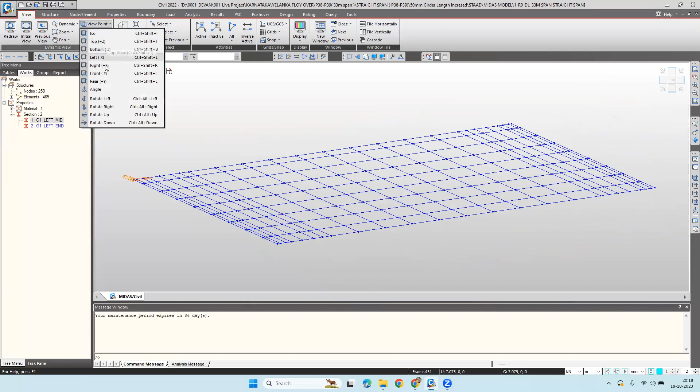Devani also has some doubt. He did not come yet. Yeah. So my first one. I have created all those wherever I need the node element, all those things I have done. Okay, then wait. Why are you using this? You have right side viewpoints available, the right corner. You do not need to go in that. But still, if you are using, okay.

Then, creating the property, material property is done. In section property, I have section PSCI. You are using composite, I think. Yes, you are using this one. This is also fine. What I'm telling, this you can use, but in this, if you have monolithic structure, monolithic means your slab and girder are going to be cast at the same time.

What will happen if you do not design in Midas? This section is fine. Only you are going to extract the forces from Midas. That is also fine. This section, if you are using, is for analysis purpose, that is fine. And if you are checking the final stresses, that is fine.

In this, you cannot differentiate a construction stage in which the slab will come after 15 days or 28 days. The girder, PSC, and top slab will come monolithically. They will come together, not as different parts, because it is right now a combined section. If you want to do preliminary design, this section is fine. Or if you are going direct, then we have to go for this one.

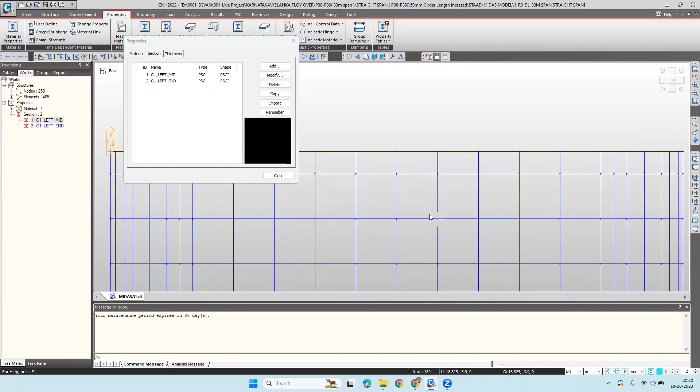Maybe I can tell you generally what will happen in the curve span. Your girder will be straight. Let me tell you some theory about curve span. Okay, sir, I will come to that point. Yeah, I will show that.

The second point is, this is the mid one I created and the end one I also created. It automatically assigned; I don't know how to unassign it. Second thing, if I create the tapered portion, in tapered I am creating PSCI. Yeah, this one is correct. Then section I and J. I have selected end support input. It will maybe give you some error.

One side is coming okay. That means support to mid section, it's creating automatically. Y axis variation, you can see cubic and parabolic. Why is it coming? Listen. First of all, your section is not that accurate. If you look at the sizes, your top flange is not matching the top flange of the other section. Can you see clearly?

I have tried more than 1 hour. I have wasted my time. See, BL2 is 1.3, I got it. Generally, that happens with everyone, not only you. Initially, I also faced it. Okay, let me give the control. BL3 is 1.3, and here also BL2 is 1.3. Two seconds. Can you give me the controls?

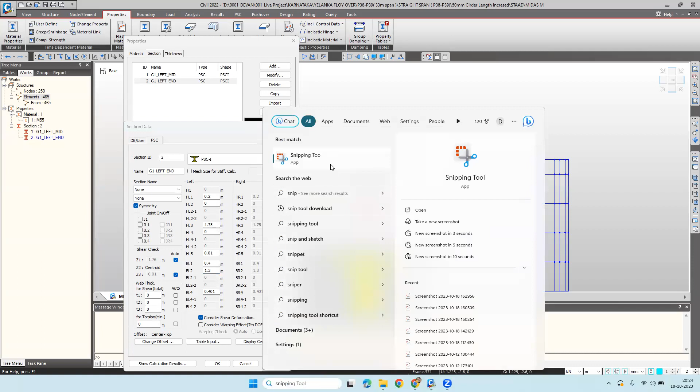Can you take a screenshot of it? Maybe I will take the screenshot, so we will be able to remember it. That's how we need to see the two properties. Okay, it will be there. Fine. Now open the other property. You do not need to. It's also here.

BL1 is how much? 0.1875. First of all, your BL1. BL1 is not the mid portion. First of all, 375, so here BL1 will be half of that. I got it. Can you open that in the side view? What do we have?

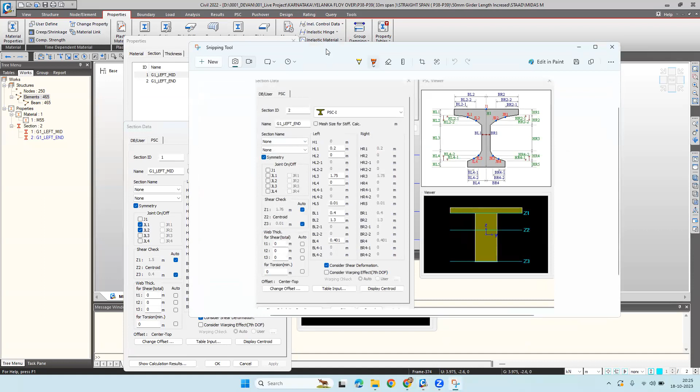Because BL2 is 1.3 in that also. Can you open the screenshot? Yes, sure. This is 1.3 and BL2 is 1.3. BL4 is 0.401. So here also I need to update BL2? 1.301. No, 401 is fine, do not change. Equal 0.4 is fine.

0.9 is fine. Do not make them equal. A little bit different, 1 mm difference should be there. That's what I'm trying to tell you. So put 901 for this 9. That is fine. Change 1.3 into 1.301. Maybe change it here, it will be able to take it. 301. Yes, okay.

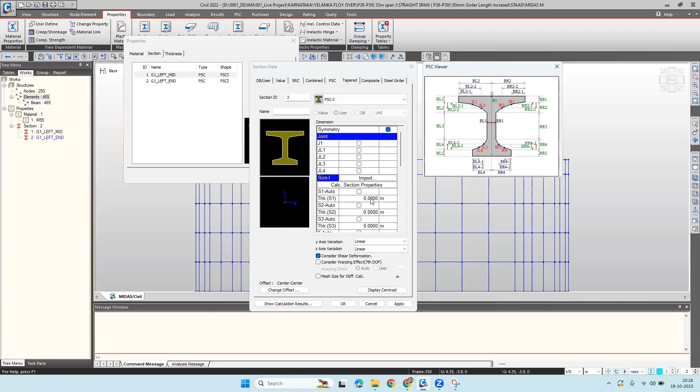Now try to create the tapered section. We need to go to tapered, PSC-I. Now here, select your import section. Fine. Now just give it any name or show calculation results. If it's taking the property, you can check. Check calculation result. Now it is coming. Yes, now working. Just give it any name.

Now working, problem solved. Yes, ma'am. This is the solution: both sections should not have equal dimensions. Simple as that, a 1 mm difference should be there. That is the main solution. So now your second point is that it is automatically taking properties, you are saying?

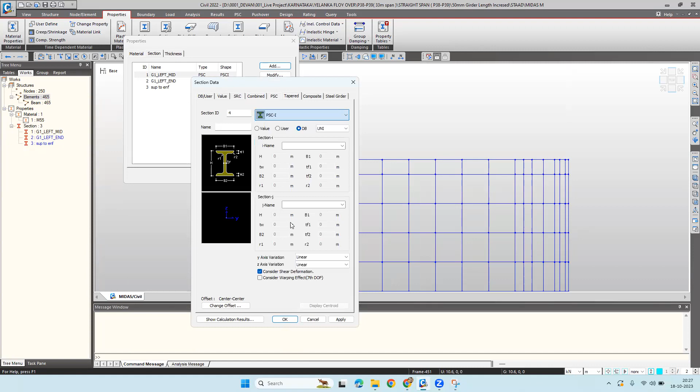Yeah, the first point is taking automatically. For the second point I got an error. No, it is solved now. Let me know about this one also. Here, parabolic, you have clicked on the y-axis variation. Y-axis variation should be linear, not parabolic. Parabolic only comes in your balanced cantilever structure. Linear. Fine, this is also linear.

Cannot calculate the stiffness. Check the centroid, click on the centroid. Not the center. It is taking something. Okay, just press OK, no issue. What is it saying? Calculation result: cannot calculate stiffness. Section dimensions have been incorrectly entered. I need to see whether pressing linear has changed something.

Can you close it? Just show me again, do not click on that. Can you go above and again to import and export? You have done it. If one is created, the other one too; go a little above. Symmetric. Here, J1, J2, unselect; is J1, J2 required? I think previously you selected it or not, I don't remember. Okay, selected. Let me check.

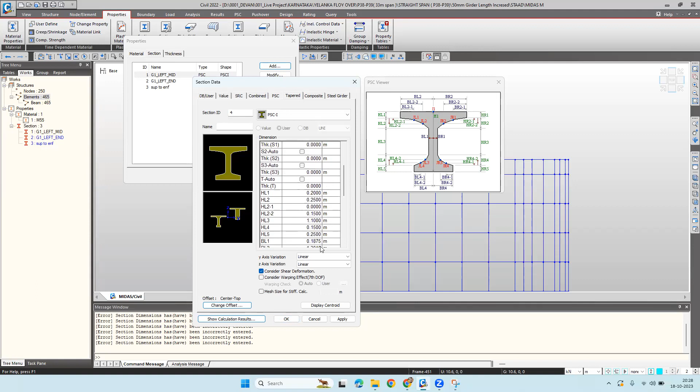You can open that. I didn't do anything previously; now it has automatically been selected. Can you close and try again? But do not select that linear one. Do not change that. I'll just create it again.

Let me check, sir. Here linear will be there. These should be linear. I know, if you do it, I know what kind of tapering is going to happen. It is parabolic or cubic tapering. Okay. Now, here, import. Yes, first I need to import the midsection. Okay.

Import. Got it. I think I know why it is happening. Okay, click. Then midsection. Just click OK directly. Do not go anywhere. Name it. Invalid section name. End to mid, this is also okay. Mid to end. Okay, fine.

Okay. No, same error. Section dimension is. Just go through the dimension BL4. Here, change BL4 into 0.40 and upper. Just change it, delete one. Delete this 0.401 into 0.4. Okay, fine. Now click OK. And go above. No issues. Go a little above, because both section properties will be here.

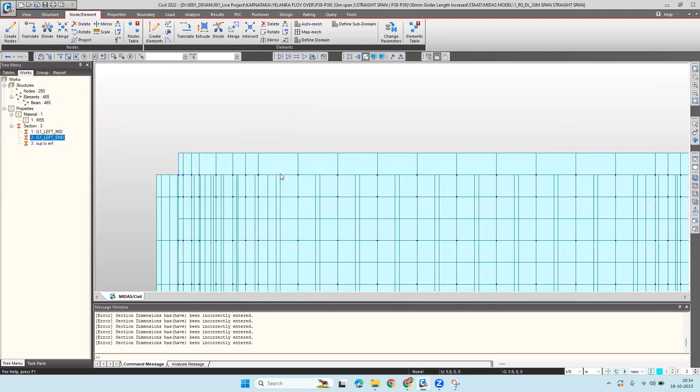But yes, in this, then how can I... Yes, tell me. Automatically it is assigned for all or? No, that is fine. It automatically assigns it. But if you want to change it, select that element and drag and drop the property. You getting my point? Okay. So which element? No, first of all, go to line model. How? Go to line model. Go to line. Yes. Okay.

Now select here. Click on the selection material. You know that I always click on the yes. Now which member you want, which property? No, first of all, do not select the members. Select member. Select anything. Now this member is also selecting. Do not select from left to right. Select it from right, yes, like this. Now drag and drop that property. Drag, yes, it will be applied to this member. If you want to change another one, create the property and drag and drop.

Okay, but why is it automatically assigning it for all? What generally happens is, when we do not assign any property and we create one property, Midas has this kind of internal system: it applies that one property to all the members which are available. So afterwards, when we create different properties, we need to update our model. Midas does not know that you created other properties for other elements also, so we need to give the command.

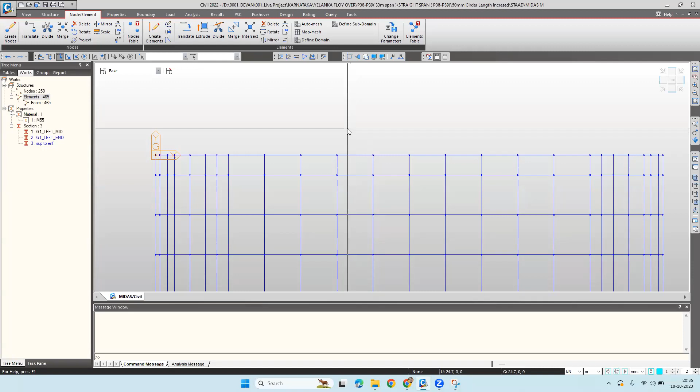Same in STAAD, but STAAD does not take any property; instead, we need to apply every property separately. But here it just takes the first property by default for all the elements. All the elements. Okay. Yes, first property only. But afterwards you can change every property, just by simple selection and by drag and drop. Yeah, then I'm showing that curved span you were asking about. Yes.

Yeah. So this one, what I did, I have... Do you have a drawing? It will be best if I can guide you with the drawing. No, I just created it from AutoCAD. Okay, just show me this AutoCAD drawing, so maybe I can tell you if you're doing it correctly or not. Because with the drawing I do not even require the model. I can easily tell from the drawing itself. Okay.

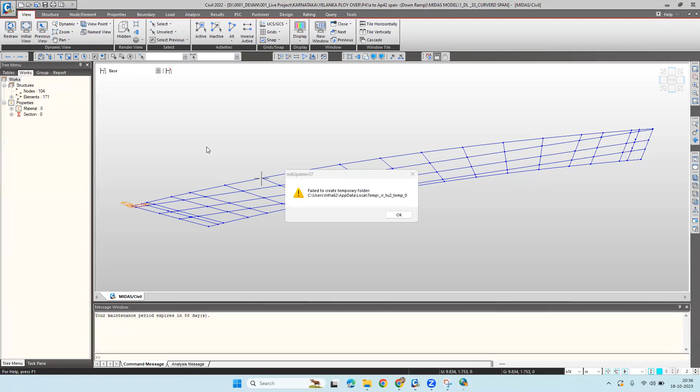Okay, does not look good. Okay, looking good. Your span girder should be straight. Yes, show me the top view. Top view. Yes, it will look like this. Fine. Now what is our problem? So here the cantilever will be 2.4. Yes, it can be possible. So in the STAAD model, we did a straight model only.

Like that only we did. Instead, you are only able to do skew or straight. Okay. So we ran the vehicle in the straight portion and we got a huge bending moment. So in the same manner, if we do the same model in Midas, you can very easily do it in Midas. You just need AutoCAD, and it will not take more than 4 hours for the whole model.

Yeah, sure. So I modeled it here, but it is still wrong. I'm trying to tell you why it is still wrong. First of all, the transverses you have created, that is fine. You tried to create perpendicular ones, but those are not looking that good either. I will show you in the AutoCAD drawing. I will tell you what happened in Midas itself.

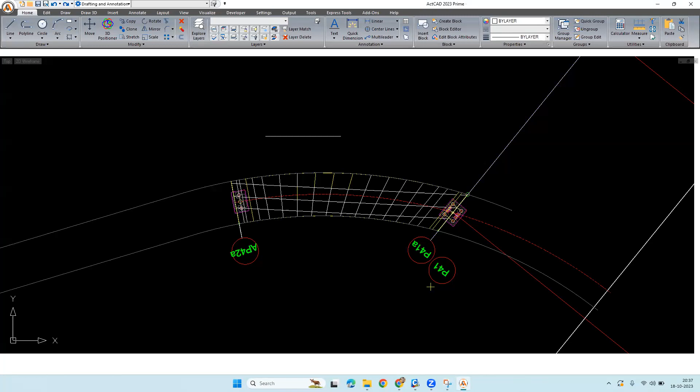What is this ActCAD? Some different software? Yeah, it's an Indian company. Okay. I know about one other CAD, I forgot the name.

Now you have done the same. You can directly paste this thing in Midas itself. That is fine. But what is going to happen? That's what I'm telling. I got your situation. Previously I also told you your end girder has more length compared to your mid girder, and the other end girder has less length. First of all, I want to know why those two piers are skewed in different directions. Why is it making a cone shape? It is a site requirement.

It will be there, not going to change this direction. This is a down ramp. We have to give it like this only; we don't have any option. Okay, that is fine. If it's a down ramp, you do not have any option. I got it.

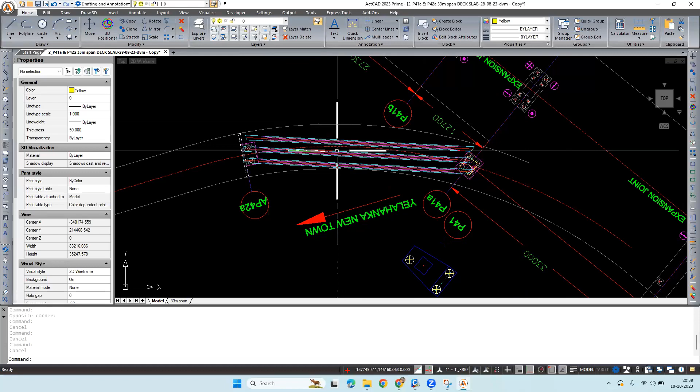Initially, they had given a box girder. Box is always best. Box is best, but they are telling me it is only 6.5 meters, and they don't have any shuttering for that, so they are asking for girders. I got it. I have done this model in STAAD also, but it's getting a huge moment.

I can model it if you can give me the drawing. Just let me tell you first. I will share my screen. Stop your sharing. I will tell you some basics about what happens in this kind of modeling and how you get the wrong result.

First of all, why you are getting the wrong result, and why initially everyone gets the wrong result. Even if I'm not that experienced and had not seen the curved bridge, I would get the wrong result; I know because I have already seen it and done it. What is happening? You have one pier cap. You can see my screen now?

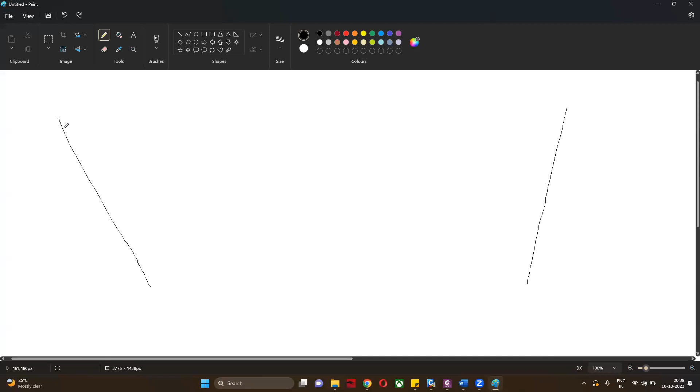Yes, sir. You have one pier in this direction and one pier in this direction. That is how the pier cap looks, and your bridge is moving like this in this curve, like this curve and this curve. Now, basically, as per our girder methodology, our girder will always be straight. So you provided one girder from this point to this point, and then one girder is here. Then last, let me make this straight. This is your one girder, this is your one girder, this is your one girder.

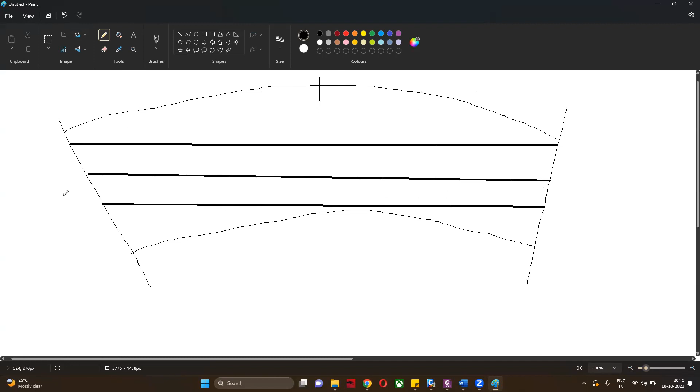Now, what is happening in STAAD? You cannot even model the curved span. You can only have a straight one. Then you try to run the most eccentric point of loading, and it is giving the maximum moment at this location. That is happening in STAAD because it is also creating torsion. Lot of things are there. STAAD is not able to properly analyze your curved span bridge.

And in Midas, you have provided this kind of transverse bracing or transverse member. That is also, you can say, not correct in the Midas modeling. What is going to happen? You need to provide one central line or something through the curve portion. Let me show you. Maybe I can show you one model also. Just give me a second.

Before that, what is going to happen? Your vehicle is not going to go straight. Your vehicle will go like this. You're getting my point? Your vehicle is always going to move like this. So we need to reproduce that behavior very accurately. We do not require any other behavior. So let me show you one example. Give me 2 minutes. I need to connect one drive to show you.

Like the box girder, that curved one you did as a line model, sir. Like that, it should be in the curve only, no, sir? Hello.

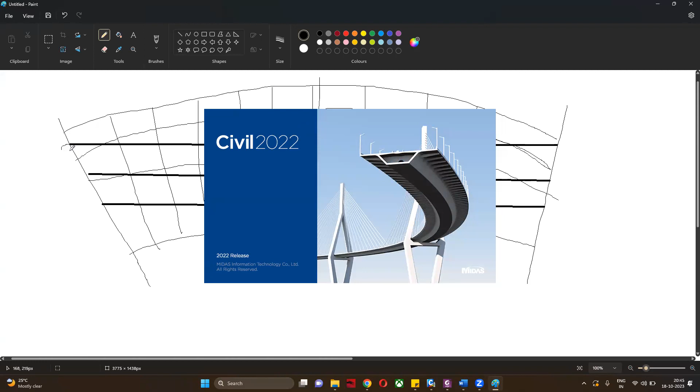And in this, I think Vignesh, in your arrangement, this girder will have more. You need to design for more PSC force as compared to this one and this one. First of all, this is the bigger one, and you are getting more cantilever in this portion. All three girders will not have the same kind of PT or reinforcement. G1 will be critical, no, sir? Yes, this one, G1. We have to give different PT. Yes, that's why I'm showing you this model. It is pretty much based on this.

You can see here, these are my I-girders. Skew I-girders, and the bridge is moving like this. You can see these lines. So my bridge is in the curve direction, and I have provided skew I-girders. Then we have to provide this curve nature. They did not ask to provide any box because this is a single span bridge. So they never ask for box. So they are going to put a lot of I-girders. If you look at the 3D view, maybe I can show you.

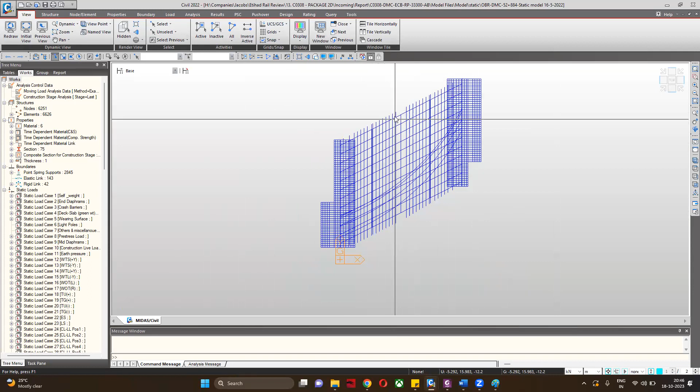So that's what I'm trying to tell you. You need to create that kind of curve lines to model your live loads accurately, and you can provide your transverse members directly straight. Now, if you look at it, that's how the bridge is moving. This portion is totally empty. Nothing is there. My slab is only at this location and at this location.

And if I go into the live load, I can share this model with you, what I'm trying to tell you. Where is my moving load? Maybe I can also show you from this. Moving load. You can see the curve skew display. That's how your moving load will move, not in straight lines.

Straight lines are for what purpose, sir? Straight are my girders, man. These are girders. You can see another one. No, this curved portion, the curved lines are girders, no, sir? No. Curved lines are my road. That's what I'm trying to tell you. Curved lines are road. Straight lines are your actual girders. So your live load is moving in the curved direction. So what you need to do...

You need to provide one curved line in the center, and then you need to model all the live load according to this line. That's how you will get it.

If I go into here, let me see the property. How many girders are there, sir? Here. And also they will cross this cross beam, but your path will be in curved direction. Your path cannot be straight.

What generally happened previously when Midas was not available, we always tried to do a straight one, considering a little extra moment, because staad does not have that much property available, or you cannot play very much with the coordinate. We can model the skew one, but curve is pretty much very difficult.

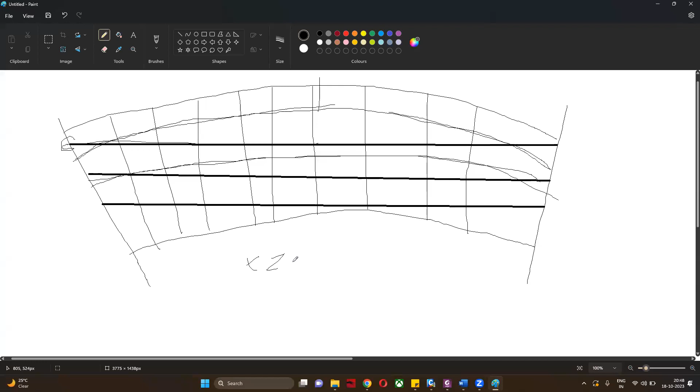In staad also it is possible. You need to provide your x and z increment very accurately so that it can interact with the actual behavior of your curve.

So what is happening here? In your case, first of all, you will model all these things. You will provide these as a straight member. Your cross member should be straight, all cross members, like this. You can see cross members, all are straight, like this.

Okay sir, and then you need to provide a curve line. One, maybe imaginary line will be there, a dummy line. But you need to provide your live load according to this dummy line.

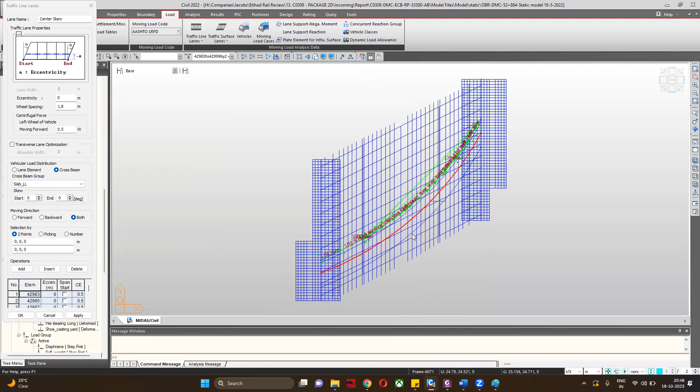Like here, I will mention a different color. From the center, if this is my bridge center, so your dummy line will go like this. And you will bound your live load with this dummy line and with this straight cross member.

So your live load distribution should be very accurate onto the whole bridge. It should not be like this, where mostly will be taken by the cantilever or less will be taken by this. Every live load will equally be coming to the girder, but because of this length, they will have some extra load on this outer girder.

But actually your whole bridge is taking your live load, not only this girder, but my live load is positioned in this direction, so that's why I have more live load as compared to these two girders. But actually, my slab is transferring live load to the girder, and the slab is also connected by another girder and also with this girder.

This will also distribute some live load. So that is the main thing in a grillage model. We need to distribute our load from the slab to the girder in such a manner that it should not go into one girder only. It should be distributed in every girder, so that you can only be able to model properly.

If I have the time, I can show you the modeling also. It will not take me that much time, but maybe tomorrow or any other day we can have a session. Maybe tomorrow, if both of you are available, I can show you how to do that. Midas will give you very accurate results for what happens in a curve bridge. First of all, you need to apply this course.

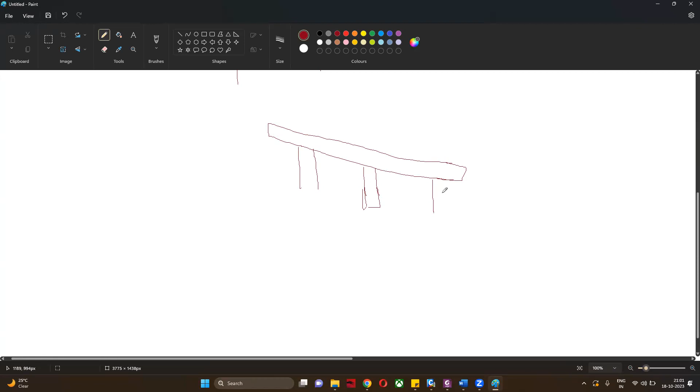Now what will happen? It is not that simple geometry. So you will have different pedestal heights. This will be small, this will be bigger, then this will be the highest one. That is the main role of the pedestal. But the pier cap should be straight, no issues. Now, with traffic at this location, the most curved span, my vehicle at this location, what does it try to do? It will apply one extra force in this direction.

Radial force. Like if you have any circle and you are applying force in this direction, the force always wants to move to a stable position. So this wants to move in this direction, but our bridge is restricting it. They want to move in the curve direction. So this is your centrifugal force. First, this force is happening. The other force is due to this curvature, directly the dead load.

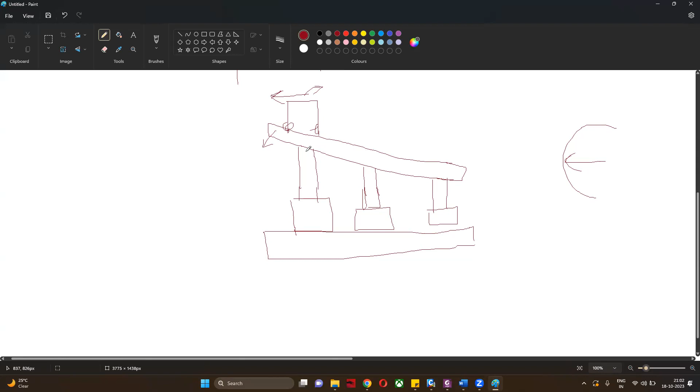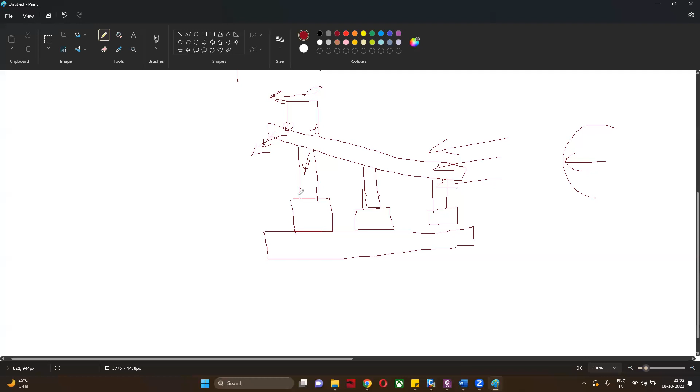What is happening in this? Your load is higher on this girder. Your slab has more cantilever at this position, so your bridge is also moving in this direction. You have this centrifugal force, and other forces like wind blowing in this direction. So everything is moving against you. This will have compression and this bearing will try to topple. So your bridge will try to rotate in this direction.

That majorly happens in very curved bridges. That's why sometimes we treat curved bridges as special bridges, because curved bridges have this kind of negative reaction. If you have a very steep curve, it is very difficult to design unless you provide monolithic connection. The best solution is to not provide any bearing, provide direct pier reinforcement to your column, so it will be monolithically connected with your pier cap, or your diaphragm should be monolithically connected.

You will have reinforcement of the diaphragm with the pier cap. That is a basic solution available all around the world. We provide continuous bridges without any bearing. You get major hogging at that location. So that is the only solution for resisting if tension is not allowed. The other solution is you can provide the bearing, but again you need to provide continuous bridges, so continuity will try to resist the toppling.

So that is one thing. The other thing, you will provide monolithic. Last is the tension bearing, which can be allowed but needs to be discussed with your client or contractor. If they are okay with it, you can provide a tension bearing, no issue. It's the government's headache if they change it in future, not ours. And the manufacturer's headache, how he will design and provide it.

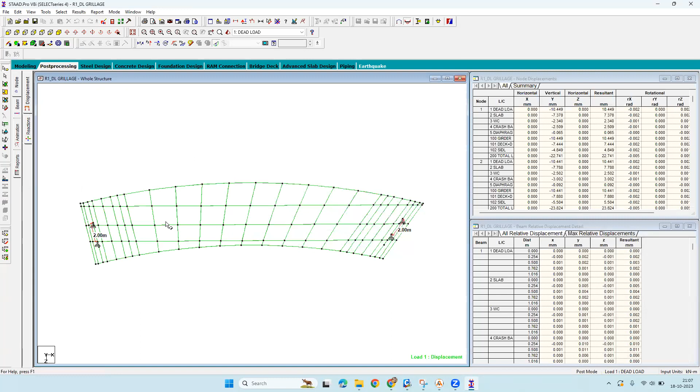Bearing to bearing distance will be around 2 meters. Fine, no issue. Just show me the reaction. And you are still using the older STAAD version. You can update it; whatever the office person gives, you can use that. Right now, for dead load I am not getting anything.

In this case, we need to increase the bearing spacing. If you increase it, we still might get something. I'm telling you, you cannot design it because you are not achieving 20%. One more thing, if you are not getting it, we can go for direct girder bearing transfer. Then you need direct transfer with reinforcement, but then you will have a continuous bridge, and you will have hogging also.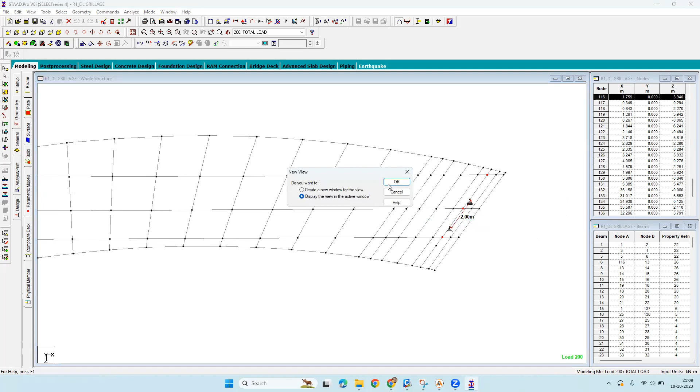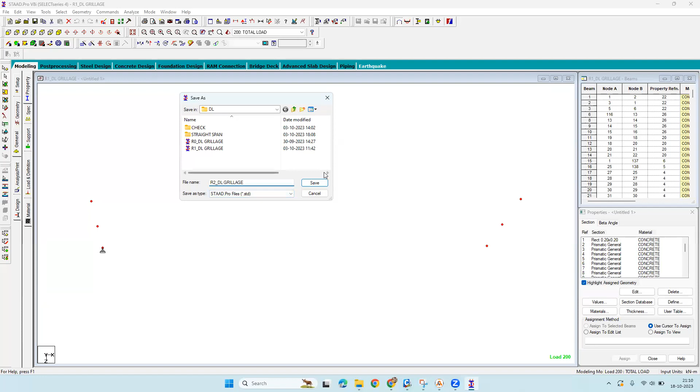What I'm telling is your girder will be directly connected with your pier cap, with no pedestal. Another option: you can provide bearings, but after that is your span straight, or do you still have a curve? You can provide two curved spans and make both spans continuous, the best option. But you cannot make I-girders continuous; it is only possible in a box girder. That is also one thing.

Because your girders are always straight. You cannot. But one more thing you can check. I think straightness is due to the supports you provided. When you have two bearings... You still have a bearing at the diaphragm location. You need to delete those bearings.

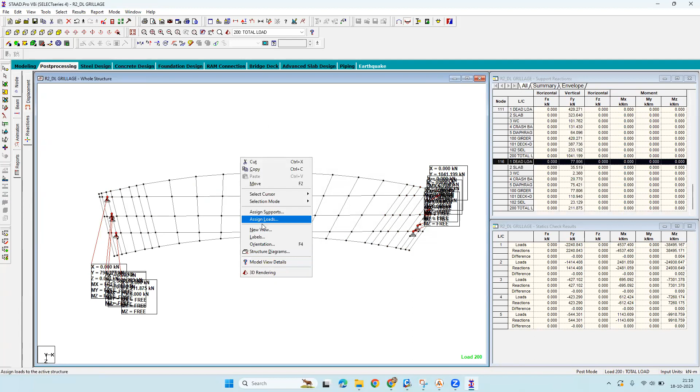Curved bridges have a lot of problems, and that's why people try to avoid curved girders and try to use the box section. And what about the torsion? You will have a lot of torsion in curved bridges. Then you need to provide extra shear reinforcement as compared to the normal one.

Yeah, sir. Curve model. It will not be correct; we will discuss properly. I think we can take one time. I will tell you. If you have three girders, you put only 3 bearings. Here is 5 bearings, here I put 4 bearings. And curve...

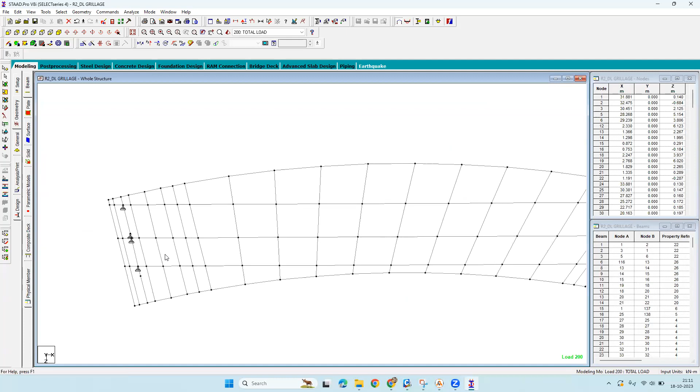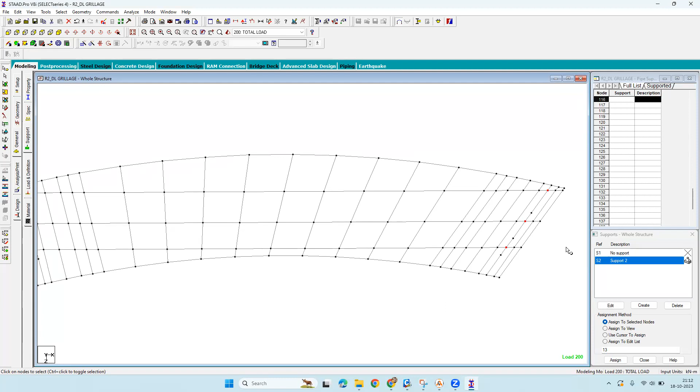Please do not submit a negative bearing reaction to the client without discussing with your senior or anyone. Otherwise, they will think you do not know that we do not allow negative reaction at the bearing unless discussed. Like the pot PTFE bearings you discussed: one fixed like a pin, one transversely free, one longitudinally free, and one free in all directions. But you never consider tension in any bearing. So they will think you do not know this, and they will raise questions on you, not any other person.

I have worked a lot on these kinds of things, so it should be properly checked internally itself. Sir, how much span do you have? What is the total span? 33 meters. Okay, 33 meters, so you cannot provide a solid slab, voided deck slab or anything. Now it is okay, sir, not getting negative.

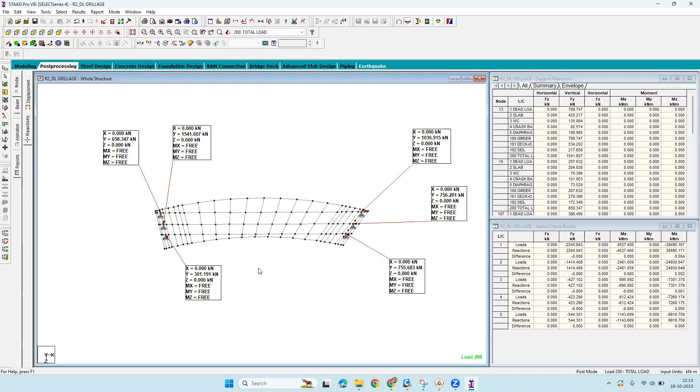The total dead load is fine, but the 20% is not achieved. This is total dead load. Still, you need to fight for it. Sometimes they can design it, but it is not acceptable. 20% dead load is not achieved, so our bearing is not in compression; it does not have any load on it. Sometimes they design this bearing as a tension bearing and consider zero tension force. No, there is some rule, sir.

Where in the code is 20% mentioned? This rule is as per practice; I need to see the code, I do not remember. We generally deal with the client and contractor. For example, for 1000 kilonewton, 200 kilonewton should be there. We got queries after submitting bearing reactions to the bearing designer or contractor saying they cannot design it because we are not achieving 20% of load, minimum compression. So then we need to consider tension, or change the bearing location or the stiffness of the bridge, slab, anything.

Sometimes we even increase the dead load. In the truss, we increase the dead load to resist toppling. Here, will increasing dead load help positively, sir? But in India you cannot increase dead load that much, because you are increasing the cost for your contractor. So do not go into that. We will discuss. I think Midas will be able to solve this. Your modeling is not that good, but if you do it in Midas, we can. Okay, we will see.

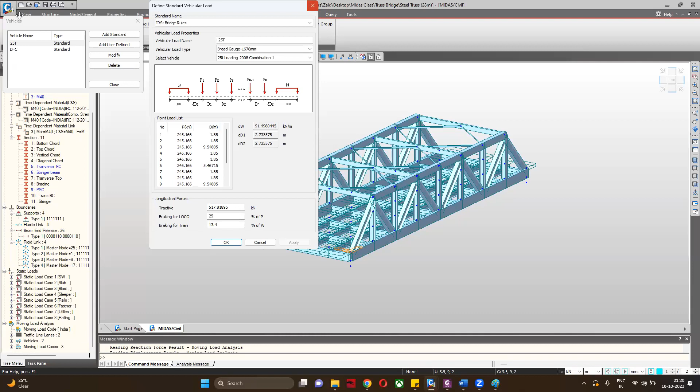And then I have run it also. Then I have provided construction stages, material, everything. Not construction stages, we are going to provide them now. Now what will happen in a truss? We discussed the construction stages previously also.

Vehicle means lane assigning, how, sir, here? The lane is just above the stringer beams, because in a railway truss bridge you will always have a stringer beam. So if you go into your traffic lane, my lane 1 will be at this stringer and at this stringer your second lane. I can show you easily. This is my first lane, and lane width will be 1.676.

We have some minimum distances for highway and also for the railway. Yes, railway also has it. The distance between two railway lines center to center is 4.5. If you have one railway here, maybe I'm not able to show, let me create it.

So can you mute? I am not the one. I do not know. Mute will be okay.

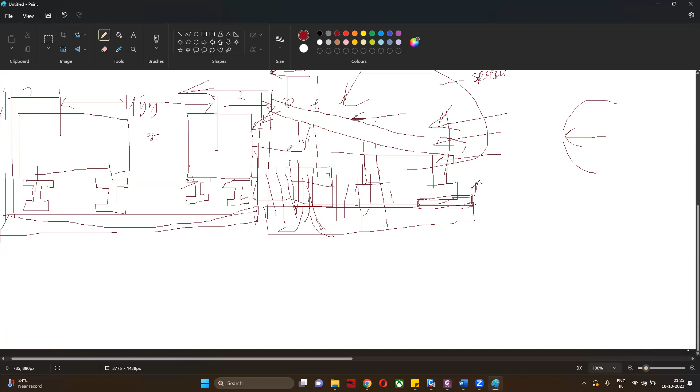It can become lower: with ballastless track, like for metro, it is a little less, like 8.5 or 9, because they do not have ballast. So you can reduce it. All cables are inside your U-girders, and the electricity column is on the parapet of the U-girder. So it is an optimization thing. But for normal steel railway bridges, you will have minimum 9 meters because of ballast and everything. I have designed 9.5; it is workable everywhere.

And this 4.5 is acceptable all over the world, because all have this wide, narrow, normal, what we call the width, the track gauge. If I go here.

You can apply directly very easily. Broad gauge 1676. So broad gauge always has 9.5 required, because sometimes they also provide a walkway for inspection, but some bridges do not have a walkway. So it totally depends on your government. This is totally decided by your Northern Railway, Western Railway, or any other railways, how much clearance you require, or if you require some inspection at the time of train running, so people can easily walk. So those are the conditions there.

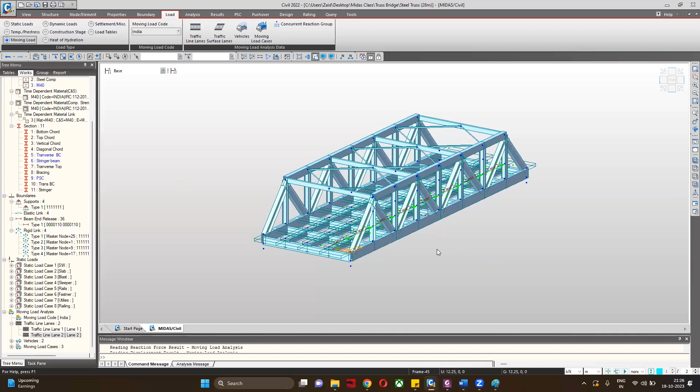Sir, these other loads, directly from the IRS code we can calculate something and put it as a sleeper? No, you will not find them. Other loads will be your wind load. No, not wind load. These self weights, you will not find these loads in any code. These are locally available or as per your experience generally. These you will not find anywhere.

Generally, what will happen? Sleeper, rail. Rail you will get around 6.1, and the rail fixtures will be 2 or 1 kilonewton. Then utilities 6 kilonewton. Some things are fixed, but ballast height sometimes changes. But the minimum height they consider is 600 mm, so we can provide 600 according to it. Then the sleeper is also fixed, because sleepers are pre-built and available. You can use any report, or Google search, to find the sleeper weight and rail weights, no issue. These loads will be fixed, and the wind load and temperature load will be the same as other measures. Nothing is going to change.

And wind load and temperature, is that applied already? No, I have not applied the wind or temperature right now, because first I want to check this thing. I want to generate the report. That's why I have not considered it right now. Maybe I can show you this model's report. Regarding the steel composite I-girder, I have a report. That model has some crash or error, so I can show you the print result.

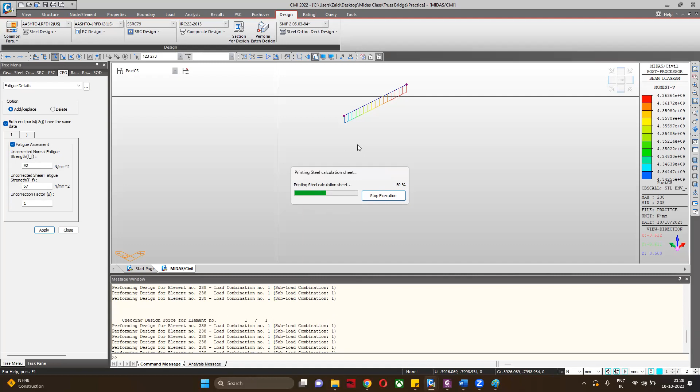Yes. Which one, sir? This is okay, it is already there. Truss bridge. Not the truss one, the normal I-girder I've shown you now. I want to show you the output file, how the result will look. Steel one, truss steel one? No, steel girder. The truss one I will create; I have not created it. I'm showing the steel one so other people can also see. That day there was steel composite. Yes, this is the steel composite one. This is for some other model; I created another model in my free time.

I told you some model error is happening. Sometimes you cannot even identify the error in Midas. You just need to create another one. If you are stuck in Midas, do not bother, leave it and create another model. If it comes again, what do we have to do, sir? We have to find some solution. Then this is our error, so that's what I'm trying to show. I created another model and got everything. Midas errors we cannot solve; our errors we can solve, maybe with my help or any senior person. But if Midas is doing something, we need to create from scratch. Midas is not that good at solving things.

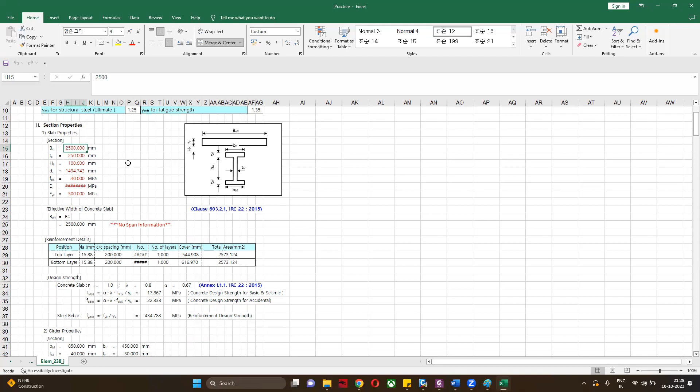If you look here, first of all the concrete slab, grade, everything they will mention: effective width, how much they are considering, what parameters there are. They will give you the different properties as per IS 2062 or the clauses of IRC 22 and IRC 24. IRC 22 is for composite, 24 is for normal steel, because it checks normal steel and composite. Then strength, positive bending moment, negative.

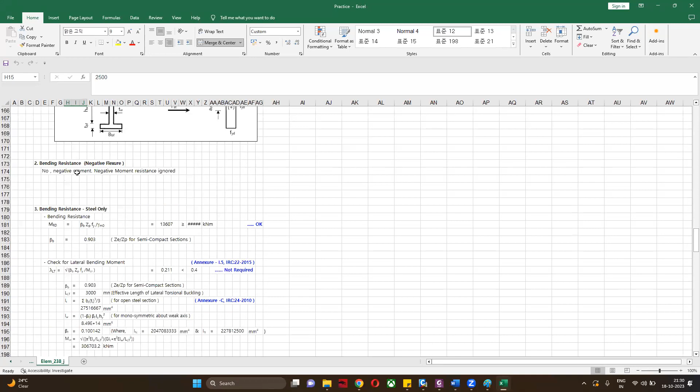Shear lag effect means what, sir? Shear lag effect is the longitudinal shear forces due to braking and all. At the top it is there, sir. Above, at this level. For bending, negative flexure will not happen, so it is not required. Transverse stiffener they will check. It will check everything, resistance to longitudinal and transverse shear.

It will give you every clause, everything according to the code. You can verify other results if you have your own Excel.

If you want to create your own Excel, generally if you are skeptical and do not want to use Midas for the design, you can use this Excel and change the parameters according to your requirement - stress limitation, deflection control, crack width in the superstructure, everything will be here.

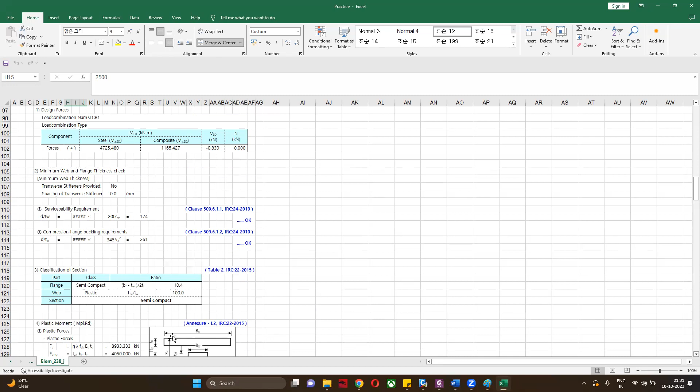So here you will get slab and steel girder both designed. Yes, slab design checks the slab with the steel girder also. It is checking, but still sometimes it will not check the transformed transverse section reinforcement properties - it is checking only in the longitudinal direction, not in the transverse.

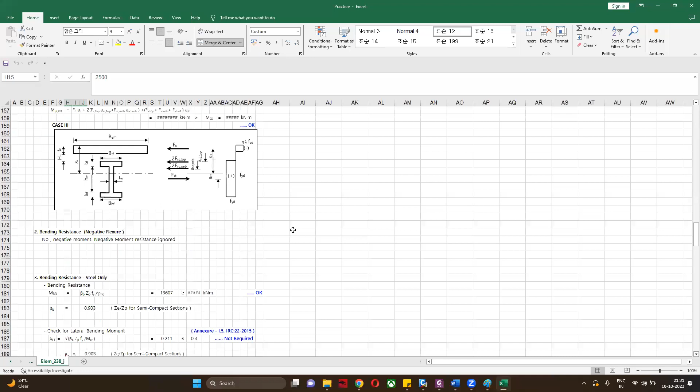So you want to see this transform section - there was short-term composite section, long-term composite section. So here, if you look at ASY, how much it has been reduced due to long-term effect, ES by EC taking 2N - that 15 I told you about.

Now this is the steel section. This is short-term composite - short-term composite is your SIDL. Then this is long-term composite. Yes, that will be also this thing.

Then crack section properties are also there for the longitudinal reinforcement. Generally we do not check this, but Midas is also doing it - so that is also one N more. I think generally from the long-term effect account, I'm not able to remember correctly, but this is checking the effective width, reducing by 15 and by 7.5.

Same thing, I think. Okay, let me go through that thickness - I do not require this. Girder probably gave the design - this is different. Reinforcement material. These are your parameters.

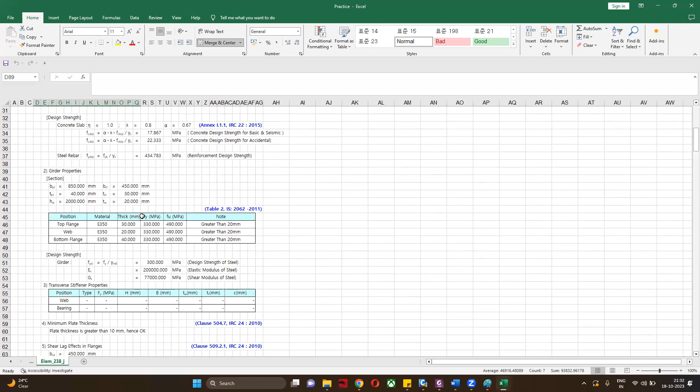Okay, design is fine. We need to go into this. Now we can see it - I think it is open. IRC, I need to open - IRC 24604. Okay, let me go.

Sir, will links be there, or will it be direct values without any links? Some links are there, but others are direct values. Forces will be directly entered, but forces and properties calculations will directly be - sometimes, but not all the time. Generally all things are directly connected, but you can connect those dots, that's what I'm telling.

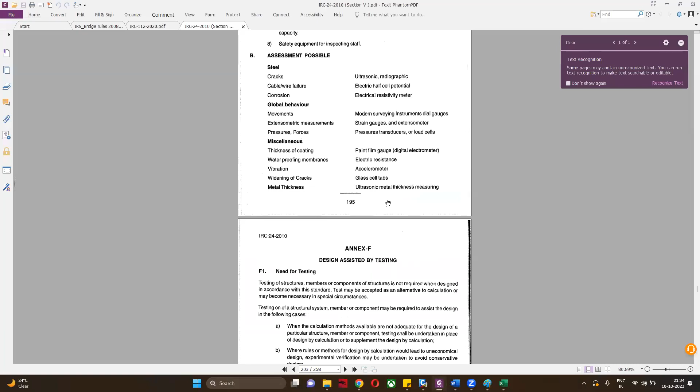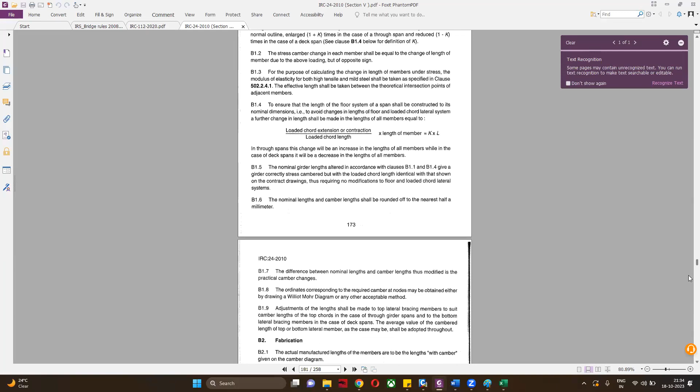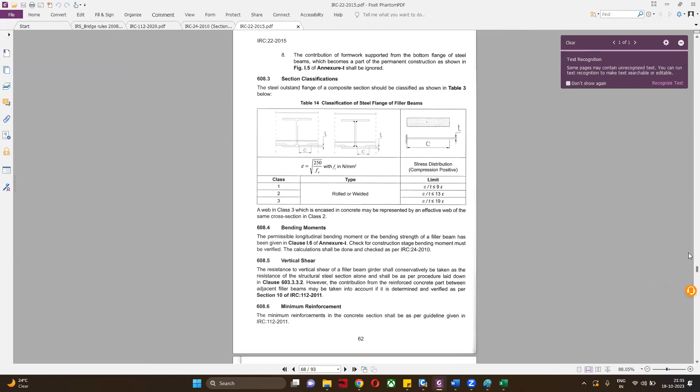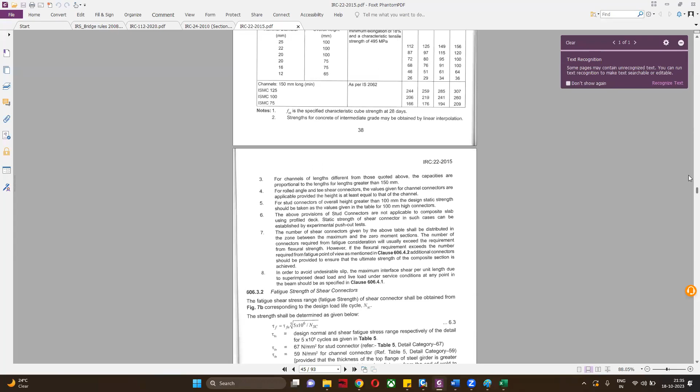Negative moment - you can see ES upon ECM upon this thing. Can everybody see? This is M - it should be more than 7.5 for short-term loading or long-term loading 15. Short-term means your live load, long-term means your SIDL or dead loads.

So this is mentioned due to short-term loading first, then long-term. Long-term means it should be 2 times of this - it's 2 times, but 7.5 into this 15. You're seeing 7.5 into 15 - that is the normal procedure limitation for every... limit, limitation, yes 15. Generally we go more than or equal to. If you are getting ES upon ECM more than 7.5, you will consider that, but you never get more than that - you always get 7.5 maximum and 15 maximum.

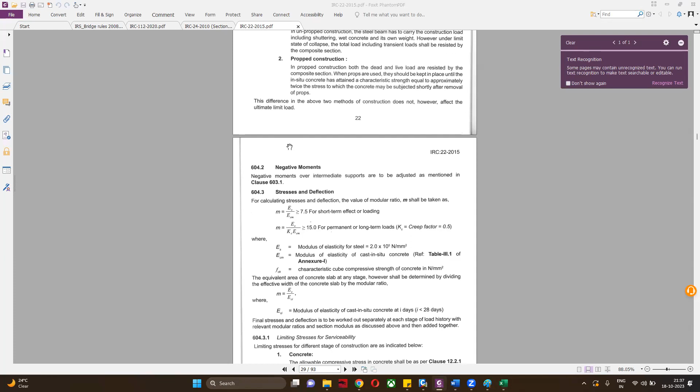Yes, due to creep sometimes - this is actually as per our grade of concrete. ECM value will change based on grade of concrete, because slab width we are changing, not the steel. Steel will have the same ES value always, even if ECM keeps on changing - yes, as per our grade of concrete, M35, 40, 45, whatever we are putting, that one.

After this bending, all those things will be there. Bending is fine, bending already there. This is the main properties you require to design a steel composite - this is the one.

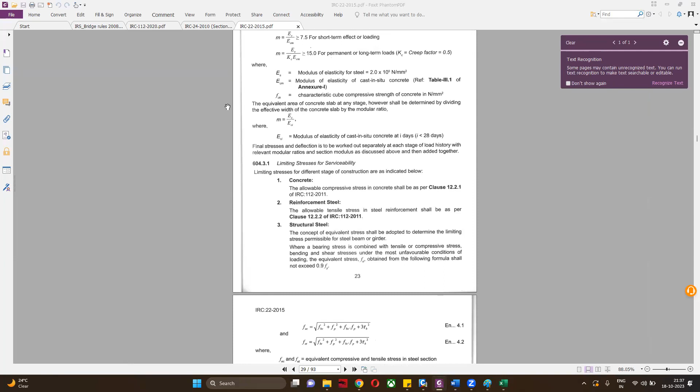Our time is almost completed and we're not able to discuss the steel part. So if I go into this - can you share the Excel afterwards? If you require Excel, I can give you. In this, some design has not been represented because I'm checking myself whether I'm doing something wrong or Midas is wrong - fatigue, you will not find shear stud because I have not considered that time in my design. When I consider it, everything will be there. If you want, I can share with you in the group.

What is the difference, sir, between what you have practiced and whatever the class has taken - is there any difference? No, sometimes what will happen is at the time of class, I leave the model open for a long time.

I do not close it. Sometime Midas has some internal issue, I do not know what Midas does. This stiffener and a few other things are there, but we have never found out. It all gives the same result, same thing, even if I have not modeled it.

What I'm trying to tell you is Midas keeps working and working. Sometimes an error will be there, and that error becomes permanent. Still you cannot find the error, and even if you solve it, Midas is like if something attains the memory, it becomes permanent, like a child. If you teach him one good thing and one bad thing, he will remember both. Maybe he likes the bad thing more, but in mind the good thing will always be there, it will not go anywhere.

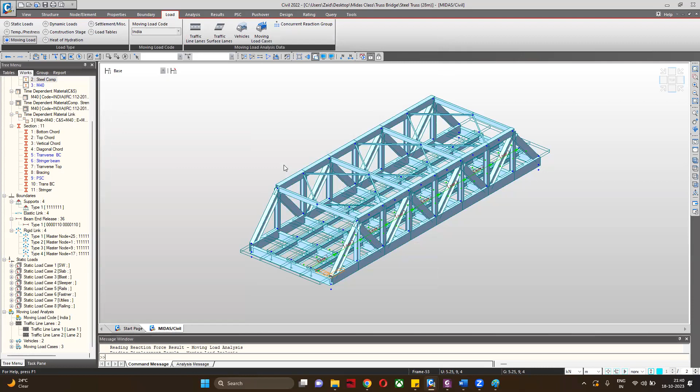If you look here, we have SRC, so we just have two materials, nothing else, steel and concrete. Same way we have to do for steel composite also. That we have not done it. No, but we have done it a lot of times, but something happened in that.

In your new model, sir, you created one from scratch using SRC, so no error happened. So maybe they created some temporary error, after which I was stuck. So no issues, we always get it.

I think we totally had doubt class today, and we were not able to learn new things. Time is almost 9 now.

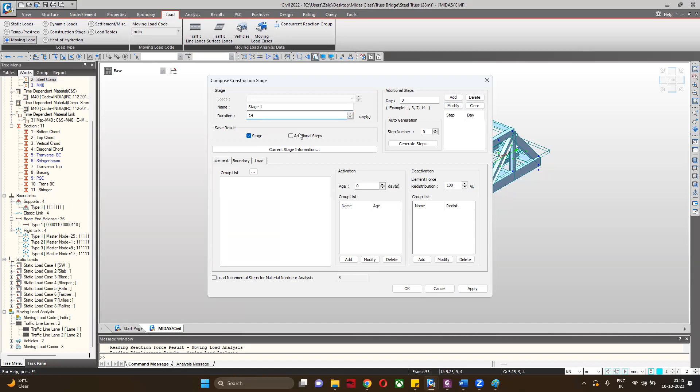In stage 1, what we can do in steel truss works totally differently. You can write down 14 days, it does not matter. First of all, I need to differentiate our things also, like I need to group them. How will grouping be done?

Truss element will come first. Then bottom transverse chord, BC, you can mention like this. TC, top chord. Then you have a stringer. Then we have bracing. So all these will be required here.

But for boundary group, we will just use one boundary group, permanent one, we are not changing. Provide permanent load group, yes, this is required. In this, I will use some ideal cases, not all, I will use some, like green concrete. Then I will have some ideal ones, not all going to put, and then we do not have.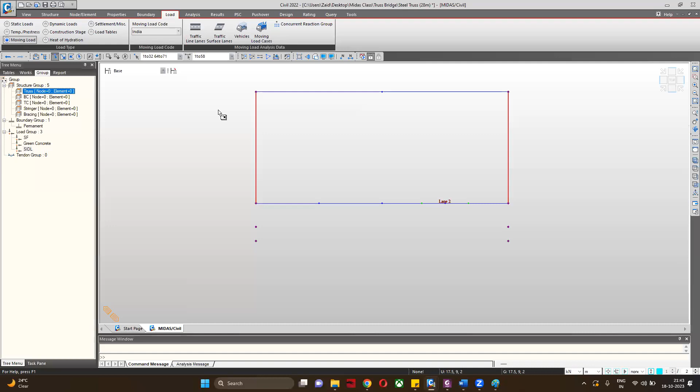So first of all, put the truss. This is my truss and this is my truss, 2 trusses in your truss. Then bottom chord I have, so I need to select only the bottom one.

The best method is this. Bottom transverse chord. Then I have a stringer, 3 stringers are there. Then I have top chord.

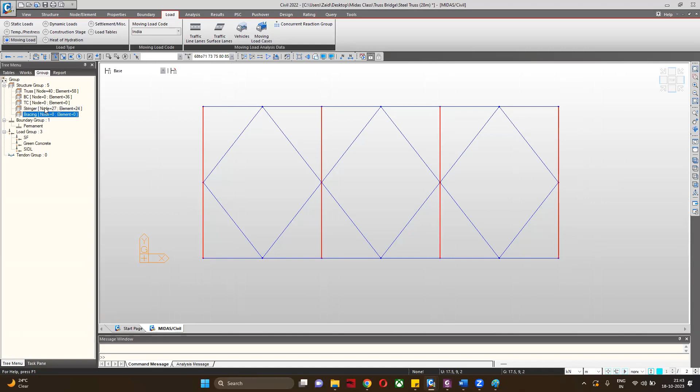This is my top. No, truss, this is already covered in truss. Top chord. Then I have bracing.

Bowstring and this one are very similar, sir. Yes, bowstring is an arch shape, looks good, and truss is just the normal one. In bowstring, you can save more steel compared to truss, because bowstring does not have the diagonal chord, they have only vertical chord and arch shape chord. What chord, sir, top chord will not be there? No, top chord will be there, diagonal.

This diagonal you will not find. Okay. But fabrication-wise, this is more simpler because in that we require some curved section, a little bit the plate should be curved, so that is sometimes not achievable.

Okay, coming to this now, here I need to change my support properties, multi-properties, default, permanent.

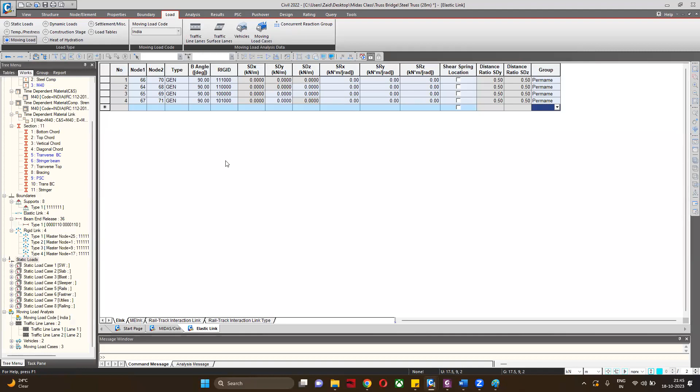Elastic link table. Change this into permanent. Here also no temporary supports, sir. No, you can directly use it, because truss will going to come, they directly put it. Do not require any temporary. Temporary is like nothing, they do not fix to the bearing, but generally sometimes they always put directly onto the bearing itself. Temporary is nothing, even if you are providing permanent to your structure, no issues.

Directly you can consider the permanent. This I would get it. No sense, in this case only all four corners, one bearing will be there, that's it, no? Yes, yes, yes. Construction stage, it will be changing. I think the time is not here, but slab also will come construction stage.

Last, I will put it in that load. Okay, ballast I can use in construction, but other load I will put top load. Modified, and this sleeper I will put it directly in that load.

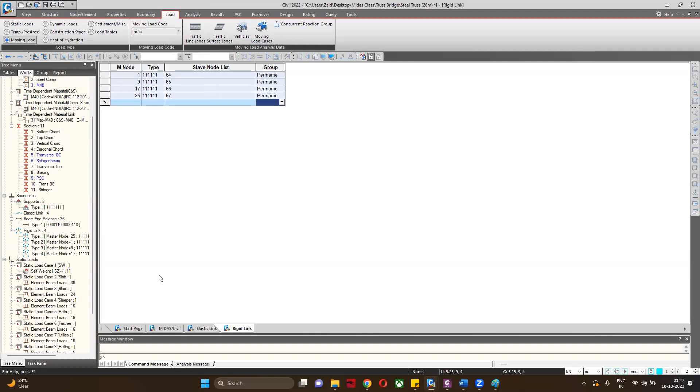So, go here, go here. Now in stage 1, what is going to be activated? Only truss. If you activate only truss, it will cause some problem also. Go to back, delete this. Truss with some days, maybe 7 days, but do not issue because this is totally a steel one. Add boundary, I can add permanent load, self-weight will come. But now what will going to be happen? Can anyone answer if I do this kind of thing? Actually does it going to work or not? Okay, we will try.

Little it will be. Now in stage 2, what you will do? We will be doing top chord and bottom chord, both with 7 days as time. Okay, stage 2 I required it. Does it not created? Cannot create it. Now stage 2, it will be 14 days, but 7 days will be already there. And

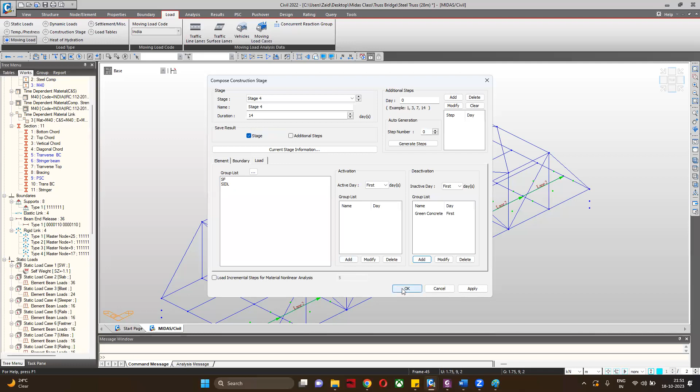Okay, this is fine. Now the main thing, I have not distributed my loads also. That if you look at this property, this should be self-weight. And this slab. This is my slab. Green concrete.

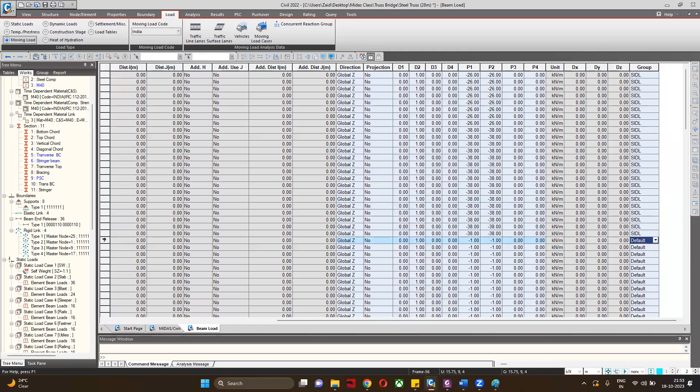And there is another load, ballast I am considering in SIDL. Ballast. That is fine, ballast would be here.

Now we have constructed this. We have constructed this, I might get error. I need to see running because I know one thing is not properly. I have to... Yes, we see it, stability we are achieving.

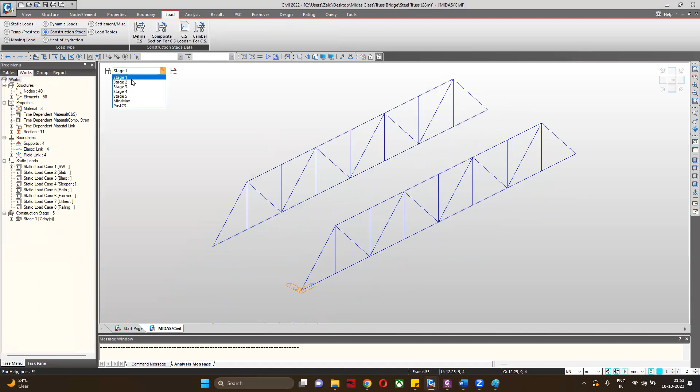We achieved it, let me see. In stage 1, this truss have been put. Okay, in stage 2, we have top chord and bottom chord has come. Stage 3, stringer beams has come. Stage 4, bracing. Stage 5, loads are coming all other. Then we have PostCS. Now if I go into the results, forces, beam diagram.

Now here you can see only this load which I have not defined in this. If I go here, yes, defining clearly, that is a good thing.

So now we will continue, and tomorrow I will save it. Now we need to first of all differentiate the composite action, and we need to design this. So these things will be there. So maybe tomorrow I'm able to finish that.

Vignesh, hello. Sir, can you share me on WhatsApp that curve by drawing? Yeah, Devan sir is having it. Devan is having, I will just ask him to share. Yes.